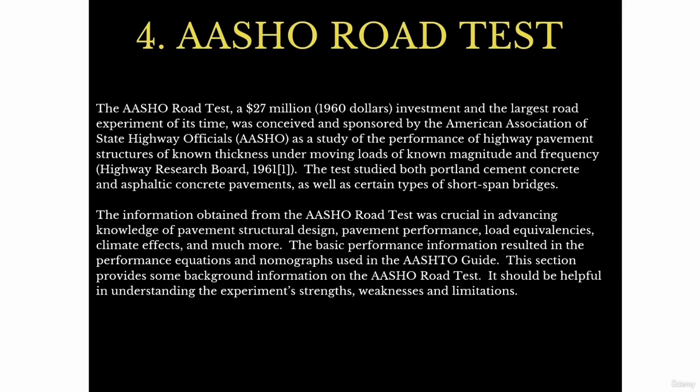So every time when you're designing as an engineer, remember there's risk, so you need to know the weaknesses and the limitations of your design, and your client must know the limitations of your design so that you don't overpromise and fail to deliver. So it's very important. So let's move on.

Okay, so that's the background. This section of section 4 provides some of the basic background for the AASHO road test, and is taken primarily from the Highway Research Board Special Report 61A. It's online. You can just Google it and you'll find it. The AASHO road test history and description of the project in 1961.

Okay, so the location is Ottawa in Illinois. The AASHO road test site, which eventually became part of the I-80 in America, I think it's a highway, at Ottawa, Illinois, was typical of the northern climate. So the temperatures are 24 degrees or 76 Fahrenheit, so it's warm. Average mean temperature in January is -2, so it actually gets cold.

I think it snows. I'm not sure about the American climate. I've never been to America.

The annual average rainfall, that's a lot of rainfall. And that's the average depth of frost. That's also a lot of frost. So it's typical USA climate. So it gets hot, but it's not that hot because it's only 24.5 degrees. In Africa, the temperatures go up to 40, 42. So this is really not that hot, and it actually gets really cold.

That's terribly cold. But we experienced snow in South Africa this year because of climate change, but that's a story for another day.

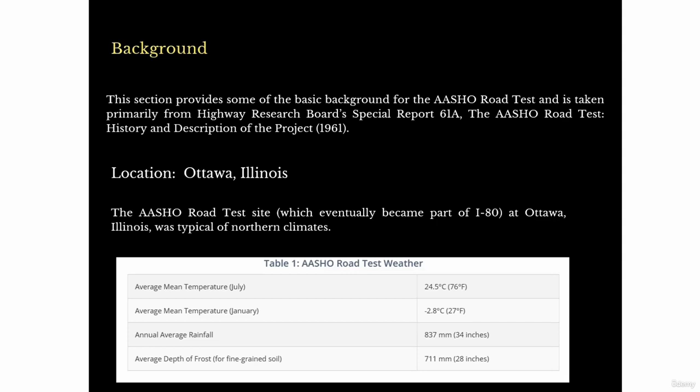And it rains a lot. It's 34 inches of rain. That's a lot. So this is just the background. This is an empirical method, but they also considered climate and rain, all the climatic factors. So this is what I'm trying to touch on. This is the background on how they got to those equations.

So this is the breakdown of how the test was done. In terms of time, it was constructed from August 1956 to September 1958. It underwent test traffic from October 1958 to November 1960. Then the special studies were done in spring and early summer of 1961. The test facilities had 6 two-lane test loops, as you can see in figure number 5.

Test loop 1 was not subjected to traffic and was used to test the environmental effects, so it was like the control. Then loops number 2 to 6 were subjected to the traffic load, so these are the ones they were using to see how the traffic would affect the road pavement. Anyhow, this is a picture of one of the loops. This is just typical of the loops, so now you can see exactly what it looked like.

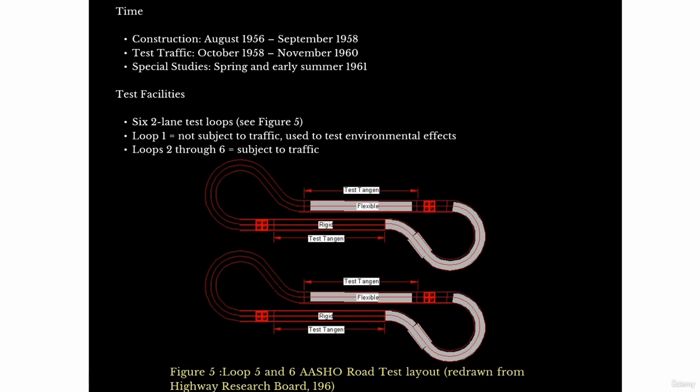So this is different loads. You can see the different types of trucks they were using with different tractor trailers. So this is just to try and give you guys an idea, to be able to visualize what they were actually doing. I think that's all for that. So let's move on.

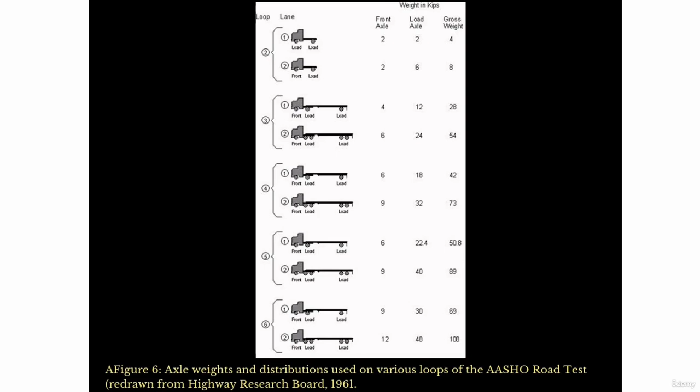So then we move on to the performance measurements. So the following measurements of performance were collected. So obviously roughness and visual distress for both hot mix asphalt and Portland cement concrete, and then obviously deflection and strain, and obviously the pavement serviceability index, the PSI.

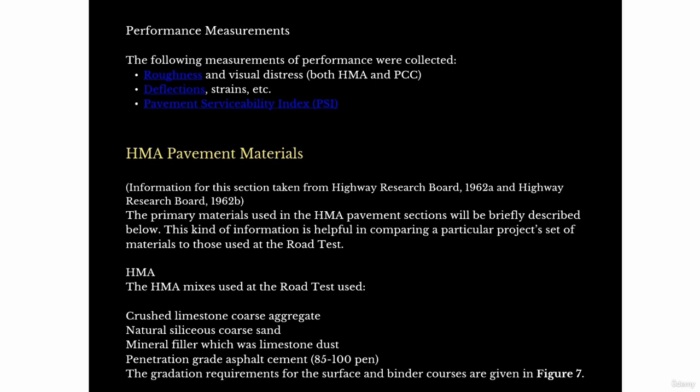So then we now move on to the hot mix asphalt pavement materials. Information for this section has been taken from the Highway Research Board 1962A and the Highway Research Board 1962B. So I'm referencing where I got this information. That's not my own. So it's important, to avoid plagiarism, as an engineer I must always follow our ethics, because I'm held to a standard by the Engineering Council of South Africa and New Zealand engineers. So I'll always reference where I got the information from.

So the primary materials used in the HMA pavement section will be briefly described below. And this kind of information is helpful when comparing a particular project's materials to those used in the road test. So the HMA mixes used at the road test are crushed limestone coarse aggregate, natural siliceous coarse sand, mineral filler, which was limestone dust, penetration grade asphalt cement 85 to 100 pen. The gradation requirements for the surface and the binder courses are given in figure number 7. So let's go to figure number 7 and have a look at that.

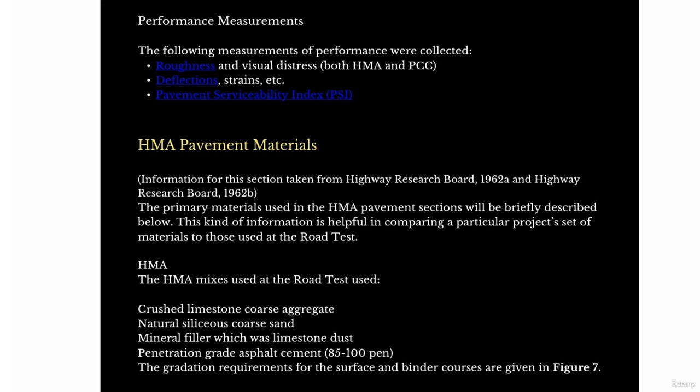For the HMA surface test section in loops 3 to 6, the surface course was 1.5 inches thick. You can convert that to centimeters. The HMA mixes were designed by the Marshall method using 50 blows per face. The typical field asphalt contents were about 5.4 and 4.4% by weight of the total mix for surface and binder course respectively. The field air voids averaged 7.7% for the 6 test loops.

Okay, so we're done talking about all the materials that we use. If you aren't familiar with all of this, go read it up, go look it up, and then come back. Go read up on how we carry out the mix design for hot mix asphalt. I can't go into that. That's a whole other course in itself. So please just go read up on it.

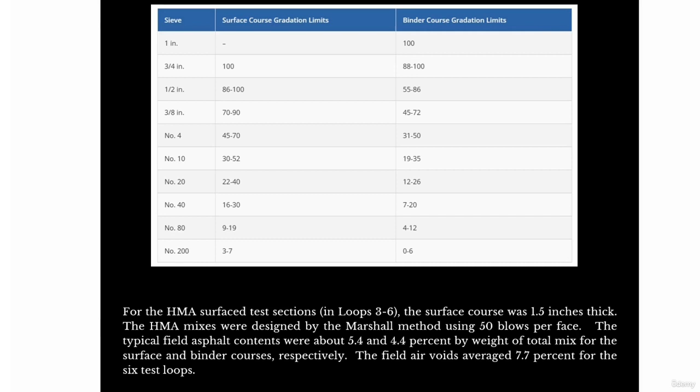The California bearing ratio of the base material averaged 107.7% based on the laboratory tests. However, the test results ranged from a low of 52% to a high of 160%, and a total of 11 tests were carried out. The minimum specified CBR was 75%.

So typically in-place mean dry densities were about 2242 and 2275 kgs per cubic meter. So that's like 140 to 142 pounds per cubic foot, and moisture content was ranging between 5.6 to 6.1. So all of this is basic geotechnical testing. If you guys are not familiar with your geotech, you need to go read up on that.

I'm currently studying geotechnical engineering, so I'm familiar with most of this. We've been doing it in school, we've been doing our labs, and also I did it for my undergrad. So if you're not familiar with this, most definitely go read up on how to find your dry density so that it makes sense as we carry on with the course.